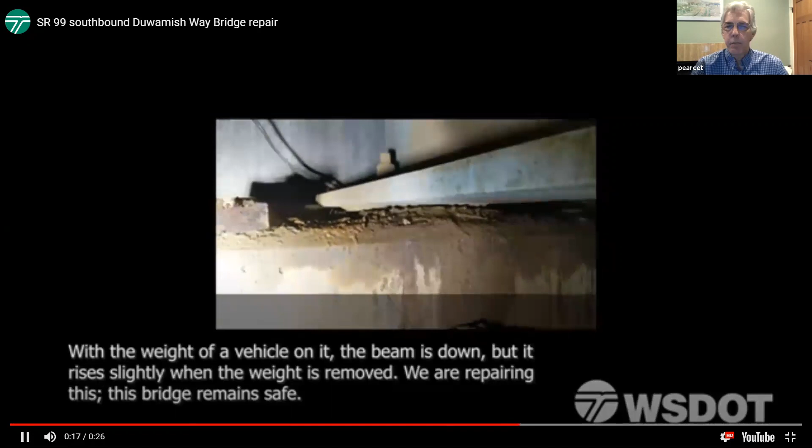So what we're going to do is jack the bridge up just a little bit, which will give us access. It'll take the girders off of the pads, and then it'll allow us to get in there, clean them up, and put in the new pads.

We also have some steel repair that we need to do. That's going to require taking out some concrete from the bridge deck, which will give us access to get in there and do the steel work.

Once we get that taken care of... I'm sorry, hang on, I'm on call for DOT this week, so I'm just going to hang up on him. I'll get back to him.

So we need to remove the concrete, and then we'll get in and do the work on the steel, and then we'll pour the concrete back. You're going to see some time out there where it doesn't look like we're doing anything, but that's just because the concrete is curing, and we need to let it sit so that it stabilizes.

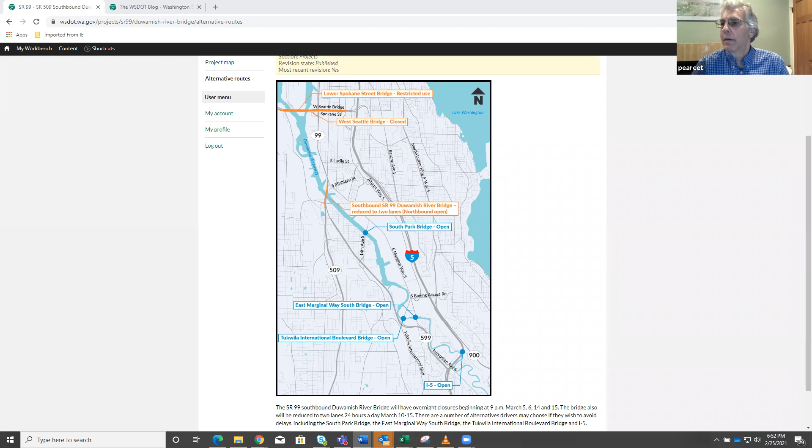So anyway, that's basically what I have. I don't know how to unshare my screen at this point. Is that it? No, that's just moving stuff around. There we go. You unshare. I took care of it.

Oh, okay, cool. Thanks. So that's what's going on with the bridge. That's the situation with people being able to get around. The bridge will be open. People are going to be able to get where they need to go. They just need to plan ahead. That's kind of our biggest message. And with that, I'd be happy to answer questions.

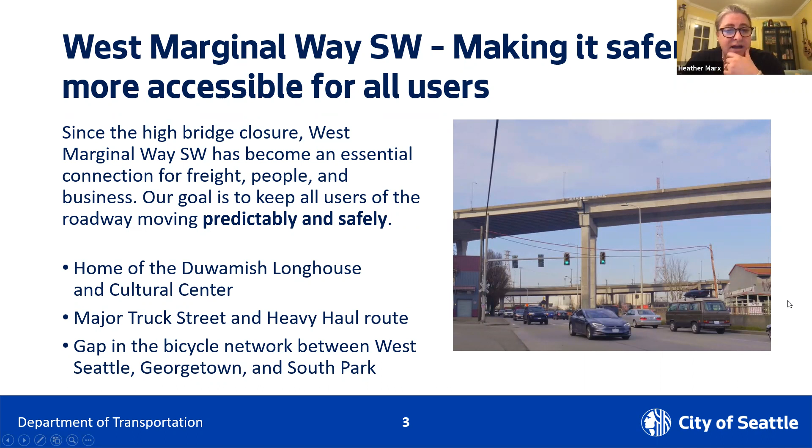As you know, West Marginal Way is home to the Duwamish Longhouse and Cultural Center. It is a major truck street as well as a heavy haul route. And there's also a significant gap in the bicycle network between West Seattle, Georgetown, and South Park. Next slide, please.

So I wasn't there. I was taking vacation, which wasn't as restful as I had hoped. But at that February 18th public meeting, we had about 80 community members attending, and we shared information about the confirmed 2021 construction projects, including the new signal and crosswalk at the Duwamish Longhouse and Walkway. We heard support for the protected bike lane proposal, and we heard opposition to the protected bike lane proposal. Preferences included installing the bike lane in 2021 or waiting to install it after the high bridge opens.

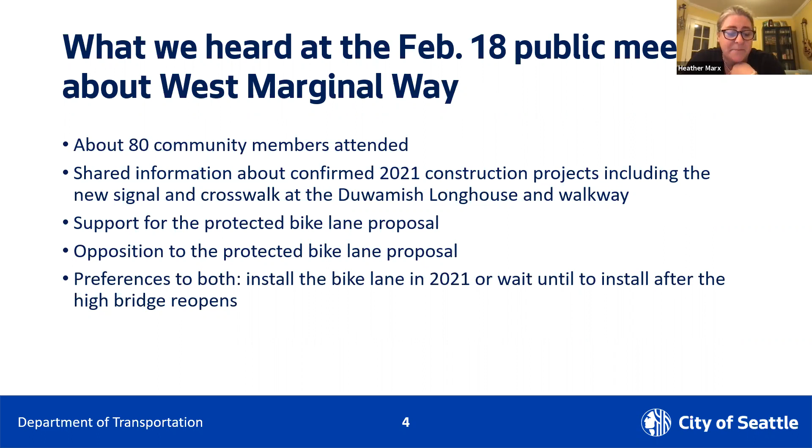So I assure you, I am not joking about this. The feedback that we had was just all over the map. Next slide, please.

So our next step is we have a survey that's still open for businesses who are located on West Marginal Way. We are doing one-on-one follow-ups with businesses in the next couple of weeks. I think Bradley is taking point on that. In March, the community input will be summarized and shared out with us at SDOT, and we'll also reflect that back to the community. We want to make sure that there's an authentic feedback loop there, and make sure that we are reflecting correctly what we heard.

We expect that there will be a decision made at SDOT in April. And of course, we're going to run that by the mayor's office. Next slide, please.

So the low bridge, as I think everyone knows, has been access restricted since the high bridge was closed to traffic last year. We wanted to make sure that we could have free access for emergency vehicles. We felt that during a global pandemic that was particularly important.

The low bridge can carry about 20,000 cars a day compared to the 100,000 cars a day that the high bridge was carrying. I think it's very clear that the demand for access far, far exceeds the limited space that we had. And so we've had to make very difficult and unpleasant choices. And so we've prioritized people who are using transit, people who are driving trucks, and people who are driving emergency vehicles for that low bridge use.

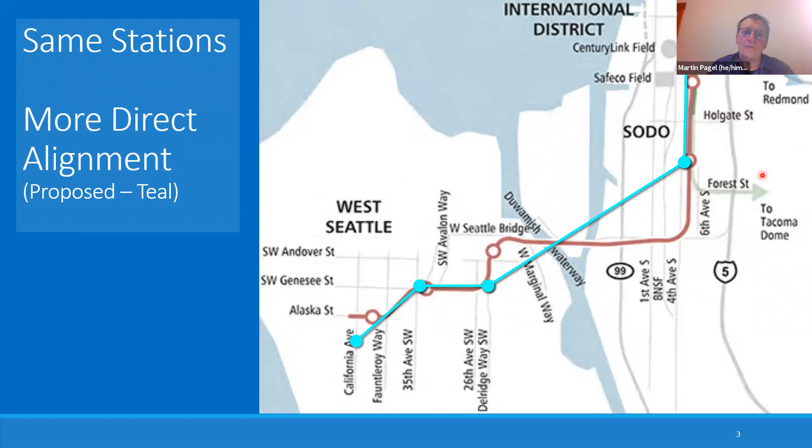In the US, aerial systems have mostly been used for recreational purposes, but now they are beginning to be used or considered for urban applications in major US and Canadian metropolitan areas. You might have seen the one in Portland or New York. But now Vancouver, BC is planning one for Burnaby Mountain, Los Angeles is planning one for the Olympics, and Oakland, Miami, and Mexico City have been rolling out multiple lines as they provide reliable high-frequency transit without reliance on crowded roadways and bridges—exactly what we need in West Seattle.

So when Sound Transit looked at various transit technologies in 2014, they already deemed gondolas appropriate for local or off-spine purposes. We believe gondolas could not only be a more prudent technology for West Seattle, but in the future might become a key technology for both Metro and Sound Transit to connect the link spine to more neighborhoods, expand the walkshed, and bring high-frequency transit to more urban centers more quickly, prudently, and with less disruption.

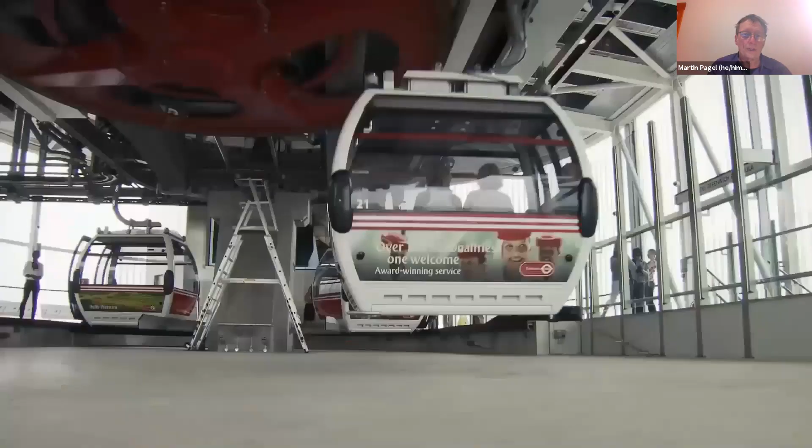To show you how that might look, let me take you to London. They don't have the Duwamish River, but they do have the River Thames. Cabins circle on a wire continuously. Every 20 seconds, another cabin arrives and moves off the wire so it can slow down for people to unload and others to board. Everybody has a quiet ride with a great view. To stay clear of the river traffic, very high towers were used.

For the Duwamish, we would not need to build them quite as high. A gondola station is typically much smaller than a light rail station. Some systems can carry up to 6,000 people an hour. It might include an escalator or elevator for people with disabilities, a stroller, or a bike.

Call buttons and a security camera may be included with the cabin so that operating personnel can monitor safety.

The main components of a gondola are standardized and get to the construction site pre-assembled. That keeps cost to about 1/10 of an elevated line. Lines are usually built in less than 2 years. Gondola systems can get operated by the manufacturer and often generate a profit. They provide the most affordable technology to provide high frequency, reliable, and sustainable transit.

The towers are installed by a crane or helicopter with little disruption to the neighborhood. As they don't need to clear the guideway corridor, the carbon footprint is low. As the cabins are lightweight and powered by a central electric motor, which can use clean energy, a gondola does not generate any emissions and is even more efficient than electric buses or light rail.

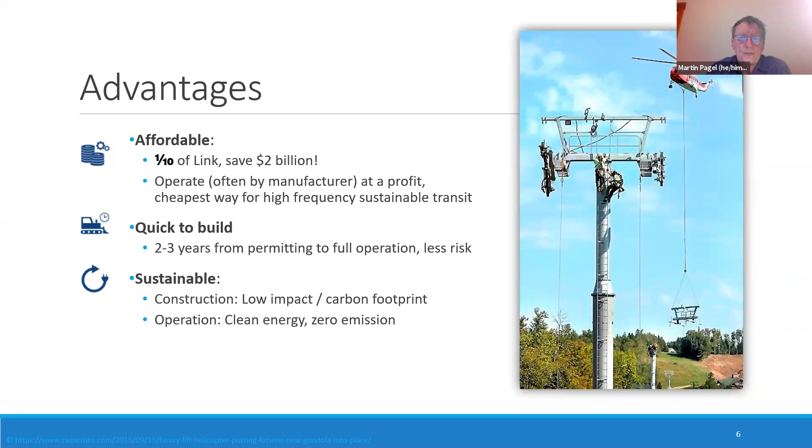Gondola technology is much better suited for our hilly terrain and waterways. It can zip right above houses, traffic, and other obstacles while requiring just a few small towers. This means less displacement and property acquisitions, and it speeds up permitting. Going over Pigeon Point Ridge also minimizes interference with the port and the steel plant and stays out of the way of the West Seattle Bridge repair and maintenance activities.

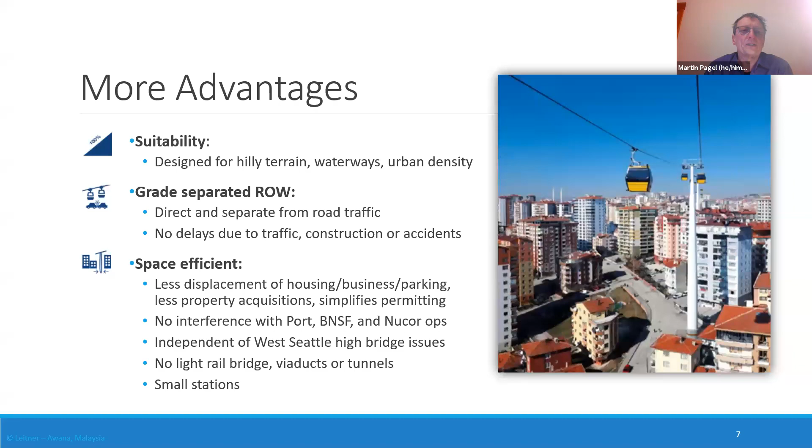Let's compare the two technologies side by side. While light rail can handle more people, a gondola can still handle more than the 27,000 rides Sound Transit expects for 2040.

But building a light rail is about 10 times as expensive as a gondola and far more disruptive, as you need to clear a path and build an elevated track, big stations, and it would require a separate Duwamish bridge. For a gondola, you just need a few towers to run a line. With the current budget crunch, the link construction schedule will get pushed out, while a gondola could be operational in 2025. With a more prudent gondola, Sound Transit could keep more Sound Transit 3 projects on schedule.

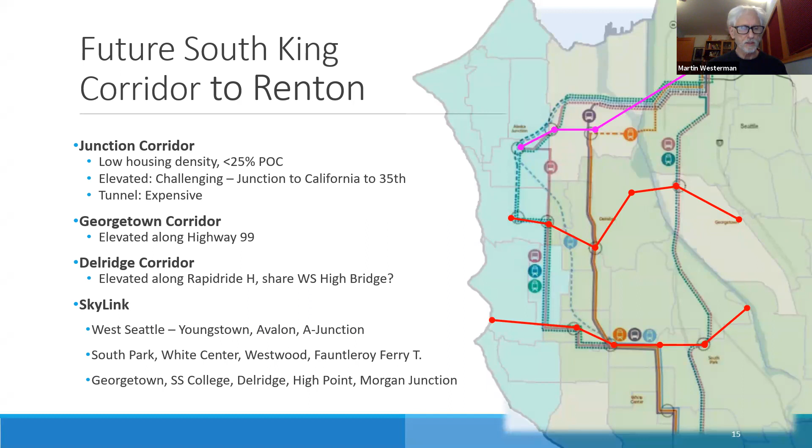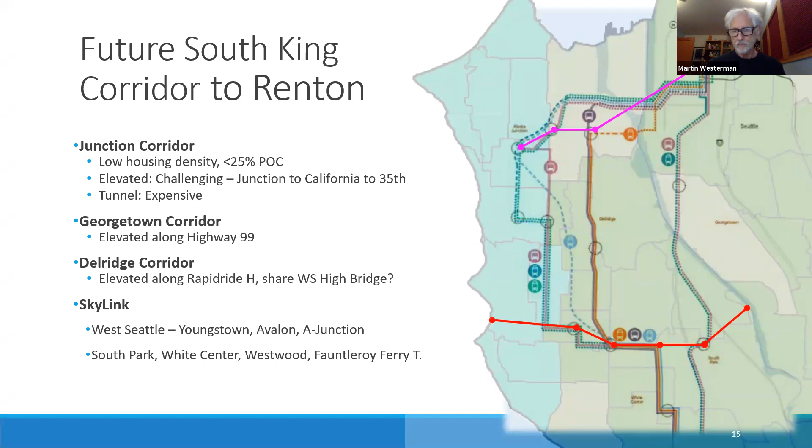I'd like to add a comment. That feasibility study would also include environmental and economic considerations, right-of-way considerations, permitting, and carbon footprint considerations. There's a much bigger carbon footprint with light rail, with all the concrete being used, than with gondola, which just needs a few towers. The energy consumption for gondola is significantly less than for light rail.

Been on this too, and the feasibility study is surprisingly affordable. We've been quoted a number of $250,000 or less to complete a feasibility study. That's a very small amount of money, so the reality is we are reaching out, doing asks, and going to make that part of the conversation here in the near future to try to pull together that funding so we could get that study done.

Let's see. Sorry, I kind of lost track in the chat here.

So, air rights - how will you address passing over very dense neighborhoods with the gondola passing 100 feet over people's houses? How will you account for the purchase of air rights? I know Marty answered that in the chat, but if I lived under this, what would I need to know right now about air rights?

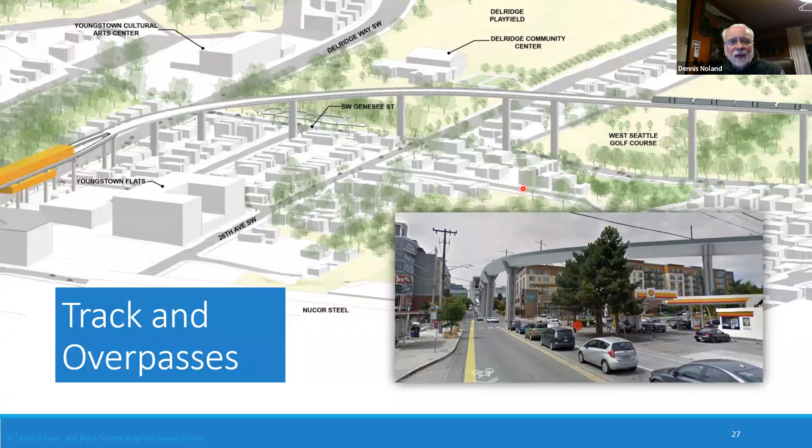Martin, can I add a couple more comments - gondolas are very quiet. Light rail is not, so we're eliminating the noise impact. And along Genesee, the light rail, one of the configurations would have it at 150 feet above the roadway, which would be quite an impact on the neighbors still there. To put this in perspective, at 150 feet, that is higher than the high West Seattle Bridge, and that's in a residential neighborhood where you'd have the noise of the trains.

So there are some pluses and minuses to both technologies, but I think when you weigh it out - the 5 years of construction impact of light rail, since that's the time frame they figure from start to finish, 5 years - and displacement of homes, and during those 5 years we have to get around that construction with our cars and buses.

Aerial doesn't have that impact at all. No, but at the same time, if you run a gondola across a very densely populated neighborhood, that's forever. It's not just a very short period of time that you're inconveniencing somebody in the way that they drive. You now have a gondola passing 100 feet over your head every 20 seconds, forever.

Well, you have a train running, screaming through your neighborhood every 15 minutes. But it's not running over the top of people's houses. Well, that sounds a little bit NIMBY, and that's okay. We have people who are opposed to light rail because they're going to lose their homes, and we've got people who are opposed to gondola because it's going to pass over their homes.

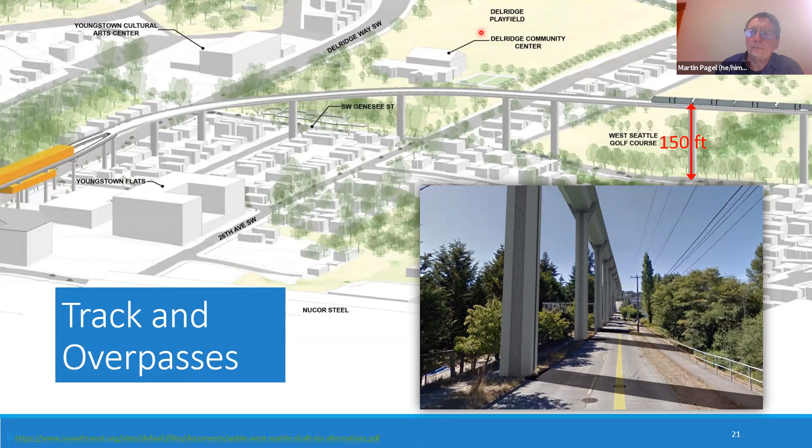I'd like to add a comment because I saw in the chat someone remark that this would attract tourists. In Mexico City, after implementing these systems, they found a couple of things. One is that even though it was meant primarily as a commuter line to neighborhoods not seen as tourist destinations, they found increased ridership, with 20% being tourists.

The other thing they discovered, a nice benefit they weren't expecting, was that crime went down — it was safer to take the gondola than it was to take a bus.

Oh, another one, a topic I didn't talk about is House Bill 1304. Can I talk about that briefly? Yeah, can you do that quickly, Martin, and then we'll wrap up? Quickly.

House Bill 1304, the intent is for the monorail, the city set up some taxing authority, and Seattle Subway suggested expanding that to light rail essentially. We are talking to Representative Hackney, who is sponsoring this bill, to expand that also to aerial cable transportation. It's kind of implied already in the bill, and we're asking them to make it specific by changing two words.